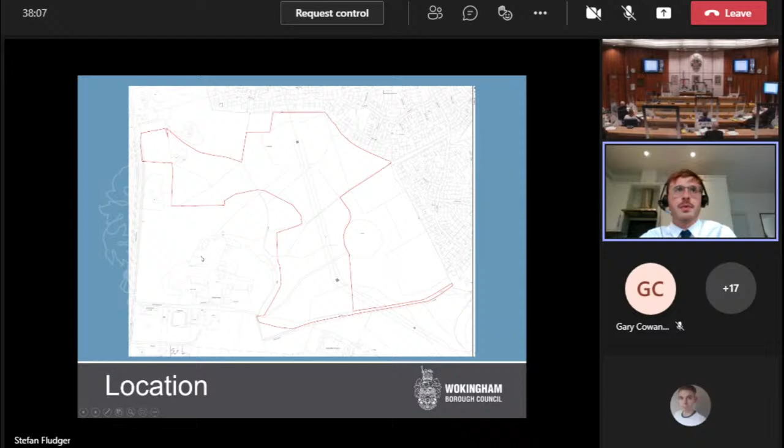This is the site location plan. You can see the Woosehill Estate here to the east, and Bearwood Road over here. The access would be from Bearwood Road, which you'll see in a moment.

This is an aerial image of the site, which shows the woodland pylon going through the middle, the Woosehill Estate over here, and again Bearwood Road over here.

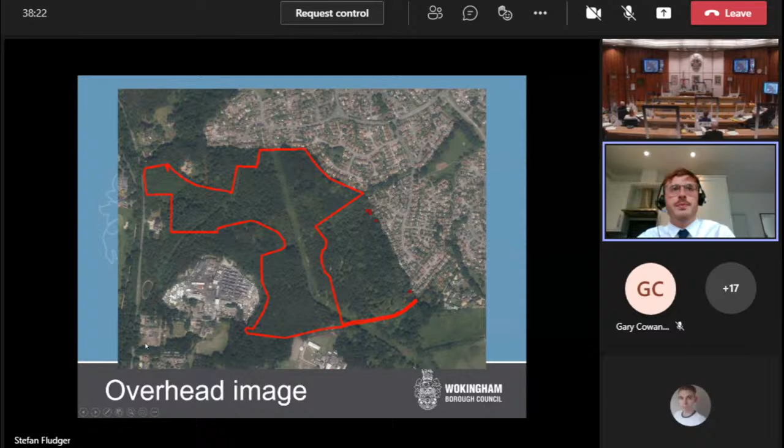This is the area that the car park will be in, which you'll see more clearly in a moment when I show you the plan, but there are the neighbouring properties here. The car park would be in roughly this location.

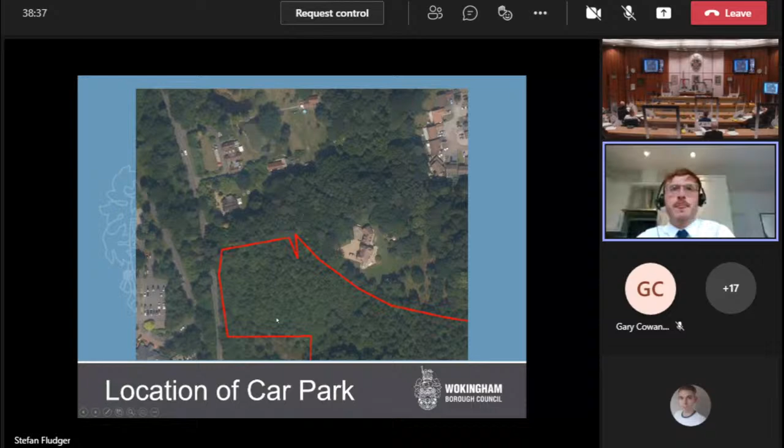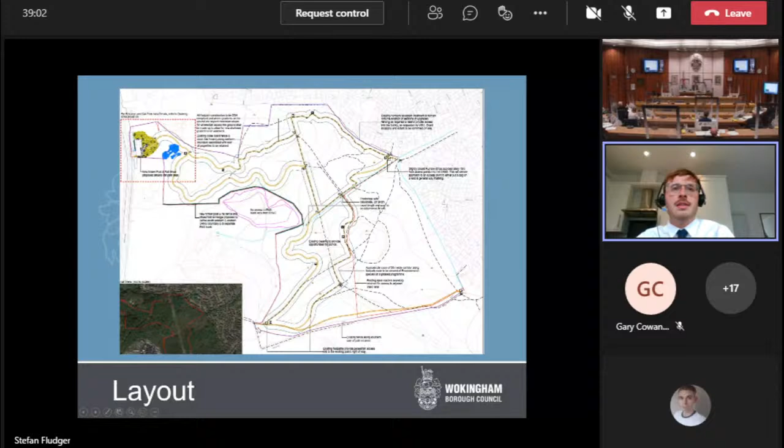This is the plan of the whole site. The yellow line shows the approximate location of the proposed footpath. This is an existing public right-of-way into the site. This is the existing access off of Dorset Way. This would be where the car park is, and this is the existing access off Highlands Avenue.

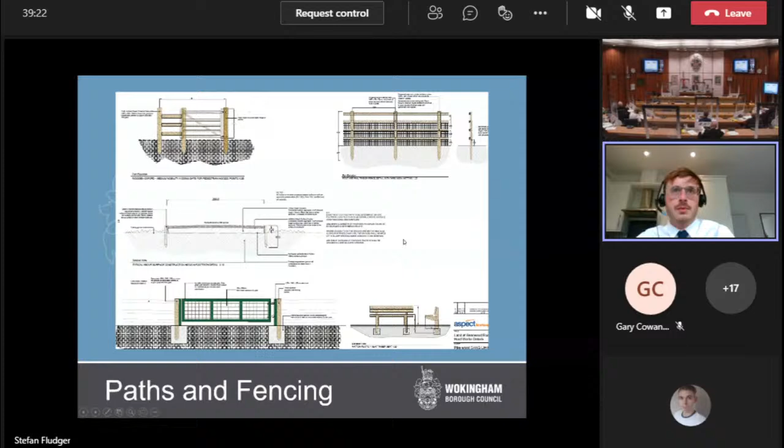These are the proposed gates, fencing, seating, and footpath surfacing. And this is the car park area, which shows the 18 parking spaces proposed, including 3 disabled spaces.

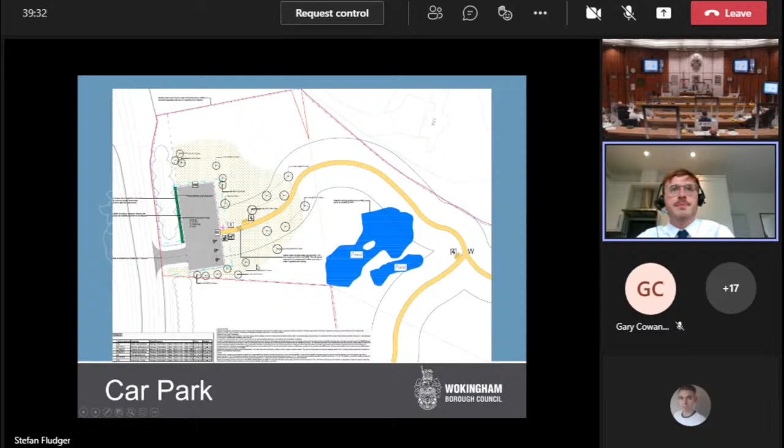There would be substantial rhododendron removal on the site, which is an invasive species. These are just a couple of images to show you the density of the rhododendron in some areas of the site.

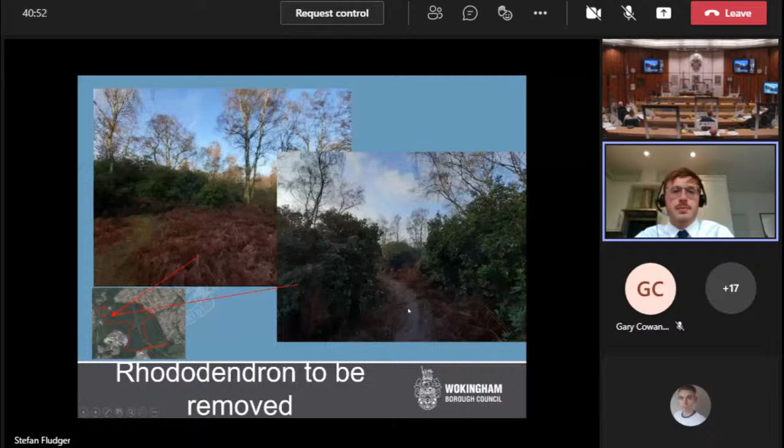However, it would be managed.

So, in conclusion, the proposal is acceptable in principle. There would be minimal changes to the character of the area. There would be sufficient parking and no other highway issues or any other issues. It's accordingly recommended for approval.

In terms of updates, there's nothing included within the supplementary planning agenda as this was published yesterday. However, I've been informed that the comments from Wokingham Town Council on page 46 of the agenda are incorrect. These are comments from a previous application at the site. The council's comments relating to the application are included on page 87, and these are correct.

These indicate that the Town Council believe the footpath should be 11 metres from neighbouring house gardens for privacy. They have concerns relating to fire service access. They consider there needs to be a maintenance plan, and they have concerns relating to the noise at A1 Business Park, just to make their comments clear. These have been addressed in the officer report. Thank you very much, Chair.

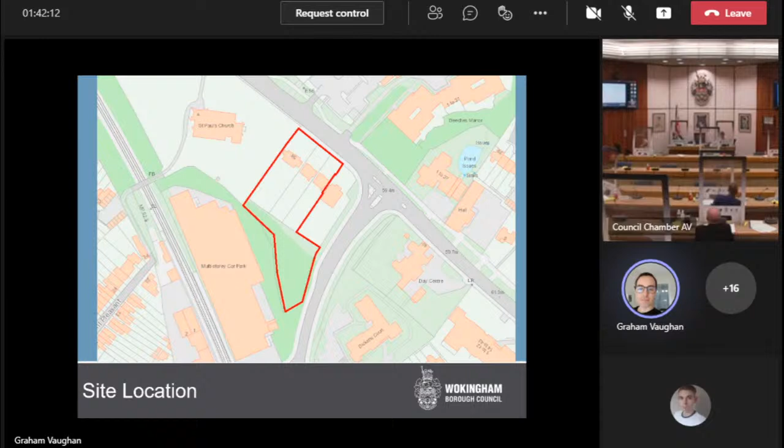The proposal is for the development of a 3-storey, 34-unit retirement living apartment scheme with associated communal facilities, parking and landscaping. Due to the shape of the site, the building has been designed in a T shape with the main body of the building addressing Reading Road and a further element projecting into the site.

A separate entrance and exit to Reading Road, as well as some parking spaces, would be provided to the front of the site, and the access road would continue along the southeastern edge of the site to a larger parking area, as well as the communal garden area.

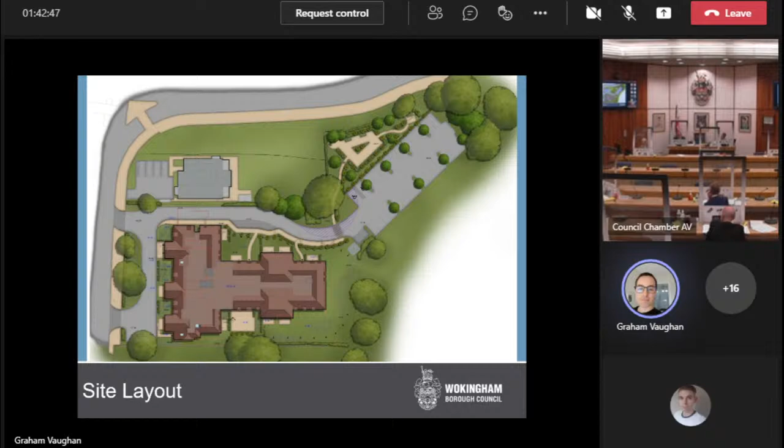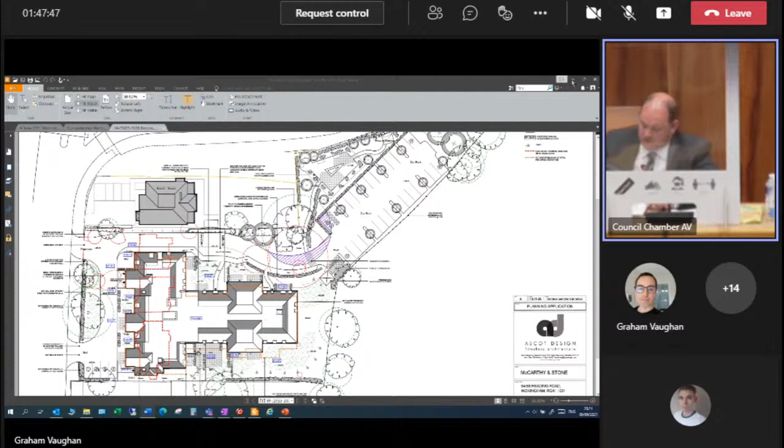The proposal in front of you this evening is for 34 age-restricted retirement living apartments set around communal facilities to provide comfort and security while supporting people to live independent, healthy, happy lives in their own homes. Such accommodation is much needed nationally and locally.

Indeed, national planning policy guidance states that it is critical that local authorities deliver housing for older persons, and is the only type of housing to have its delivery described in such urgent terms. Locally, the over 65 population of Wokingham is forecast to grow by 73% by 2036, which is higher than for the South East region or England as a whole.

This necessitates a need for over 2,000 elderly person units, where current supply is less than the county average. This clearly shows that there is a need for such development within the borough. The site is well located with easy links to the rest of the town and beyond.

The development itself is of high quality, respecting local context, while the use of materials, existing vegetation and new planting will further integrate the proposals. There have been no objections raised by local residents or the town council.

The impact upon the neighbouring listed church is less than substantial and outweighed by the benefits of the scheme, and English Heritage have raised no objections. There have also been no objections from highways regarding access and parking.

The proposed scheme will deliver a range of benefits alongside the agreed affordable housing and CIL payments, helping to support growth in the local economy and nurturing communities. Retirement housing generates greater local spend than other developments, generating over £500,000 of spending per year, approximately 40% of which is spent in the local high street, and will provide vitality to the regenerated town centre.

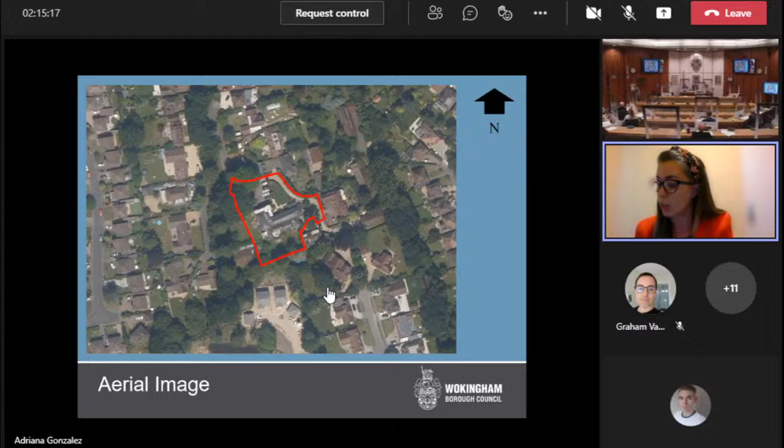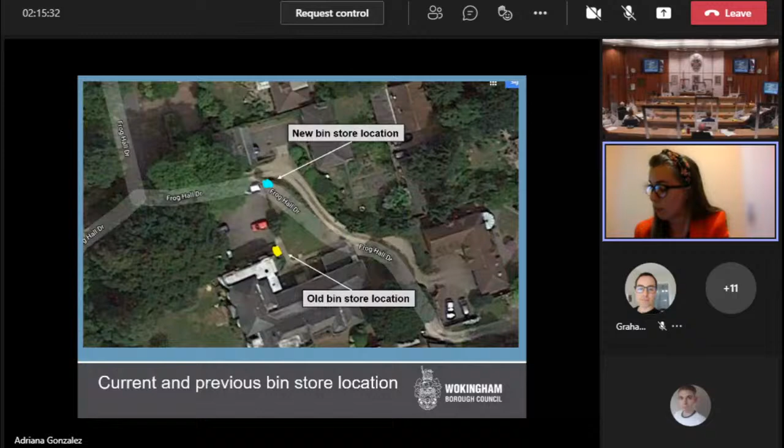This is the location plan. The bin store, as highlighted in blue on the slide, is located within part of the private residential amenity of the block of flats towards the front northeastern corner of the site. It has direct access from the private right-of-way, which is a single carriageway, providing access to the block of flats and properties 40 to 46 Frog Hall Drive towards the eastern side.

The previous location of the bin store, highlighted in yellow on the slide, was not suitable for storage and disposal of domestic waste for all the flats, being too small and far away from the council's collection point.

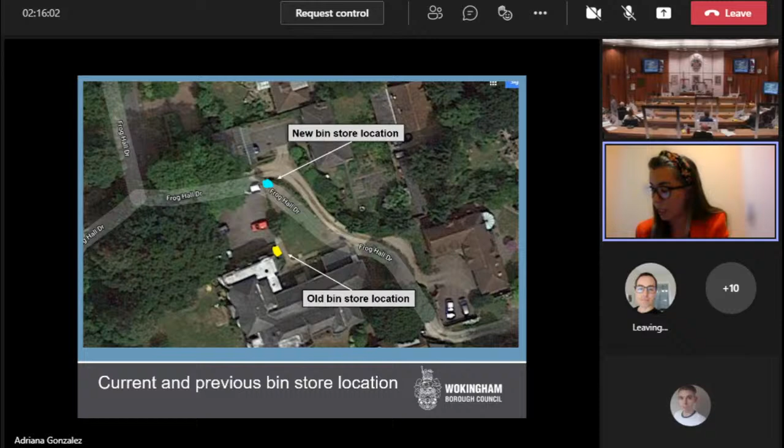This is the location of the bin store in relation to the block of flats and adjoining properties. It is suitably located for easy access for the residents and for collection, and adequately screened from public views with suitable landscaping so that it does not result in any harm to visual amenity or local character.

The location of the bin store does not restrict access of service, delivery, or emergency vehicles to properties located within the right-of-way, and it does not represent a material difference to the previous situation where trees and hedges were right up to the edge of the carriageway. There have been no objections from the Council Highway Officer, nor from the Royal Berkshire Fire and Rescue Services, on highway safety grounds.

The recommendation is that the retrospective proposal makes adequate provision for the storage and collection of domestic waste and recyclable materials, having regard to neighbouring amenity and the character and appearance of the surrounding area. The proposal does not represent a material difference to the existing situation in terms of highway access and safety, and it is therefore considered that the development accords with national and local planning policies, and so it is recommended for approval. Thank you, Adriana.

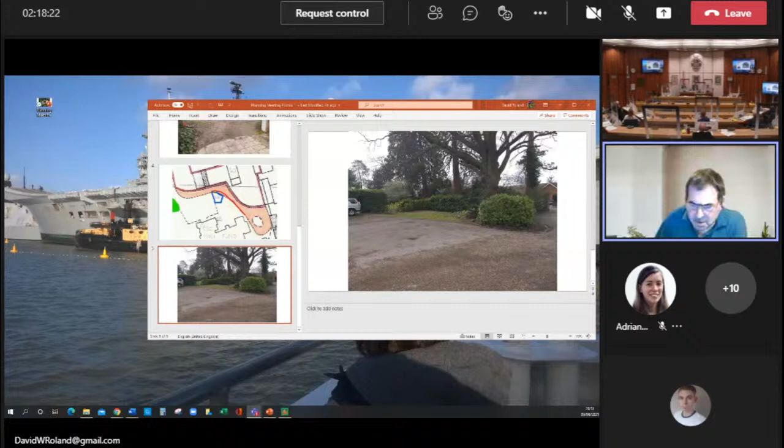Right. And can you see the slides, or? Hello? Quite small. Right, okay. Right, is that better?

Okay, right. First of all, I'll start off by saying I'm speaking for all those who object to this retrospective planning permission, and I repeat that it is retrospective planning permission. There are 2 basic objections to the bin area. One is the restrictions to access to the neighbours, the Frog Hall flats, has been reduced over decades, and this bin area does finally block the access to any larger vehicles, and it causes problems to delivery vehicles getting around there.

This disregard of the neighbours by the residents of Frog Hall does not really affect the planning permission, but it does reflect the way they should consider the concerns of the neighbours before they actually build a solid waste storage area.

The second point is that recommendations are that solid waste storage area should have proper drainage and washdown facilities. This area does not. It's also recommended the area should be in the shade. The previous area next to the hall was in the shade, and it caused problems with smell. The new area is in full sun all day, but according to the residents, does not cause any problem with smell. The previous position had a negative effect on the sale of the flats, and I think it is some of the owners of the flats who had pushed to have this new bin area built.

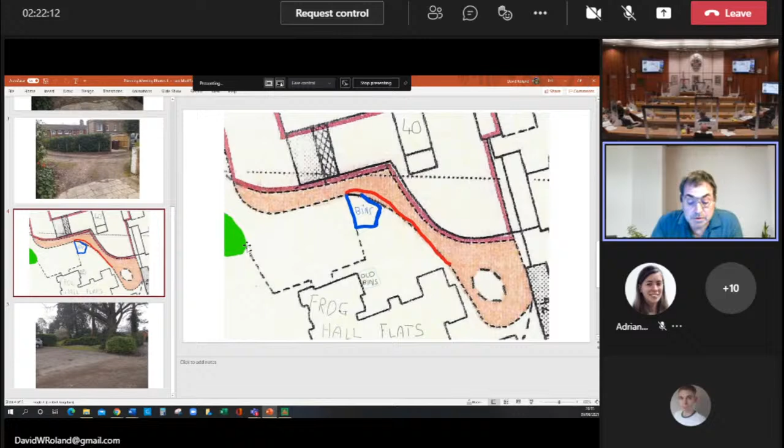And it will be wrong if this is allowed now simply because it has already been built, so I trust that you will reject this retrospective application.

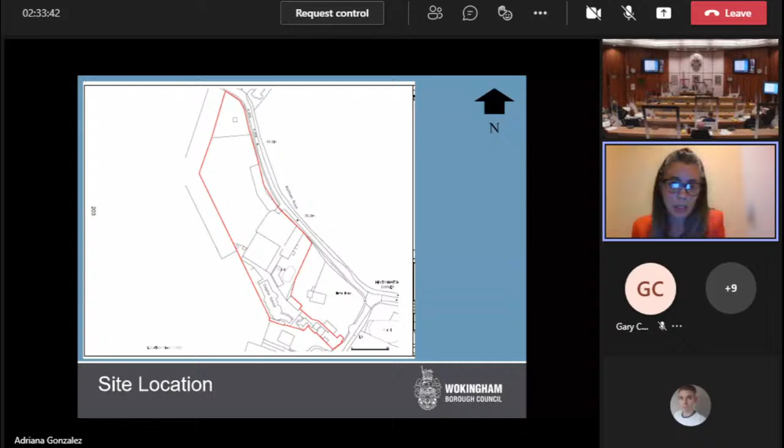Thank you, Chair. This is planning application 210805 for Dolphin School for the proposed erection of a 2-story building to create additional classrooms, toilets, and library facilities with associated roof terrace. The proposal site is within the grounds of Dolphin Private School to the southwest of Waltham Road in Hurst, and it is part of the countryside. The eastern boundary of the site adjoins the curtilage grounds of Hinton House, which is a Grade 2 listed building. The site comprises approximately 1.8 hectares, and that's the reason why it's been classed as a major application.

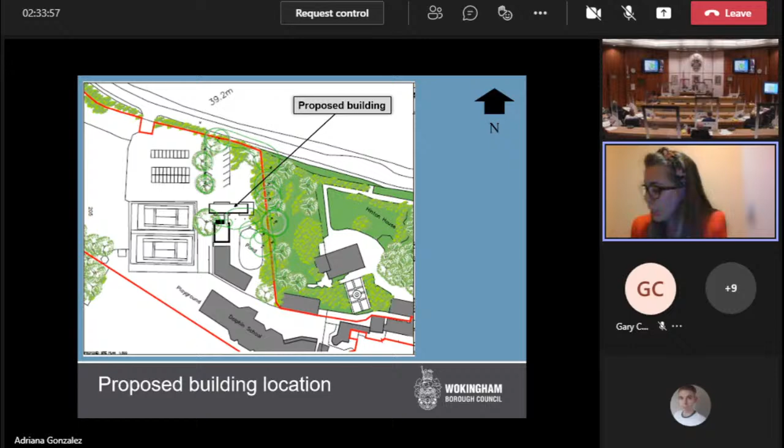This is the location of the proposed building. It would have an internal floor space of approximately 268 square meters, split into 2 levels. The proposed form and scale would be commensurate to the existing buildings on site. These are the proposed floor plans showing 2 classrooms, music room, and toilets at ground floor, and library and art room facilities at first floor.

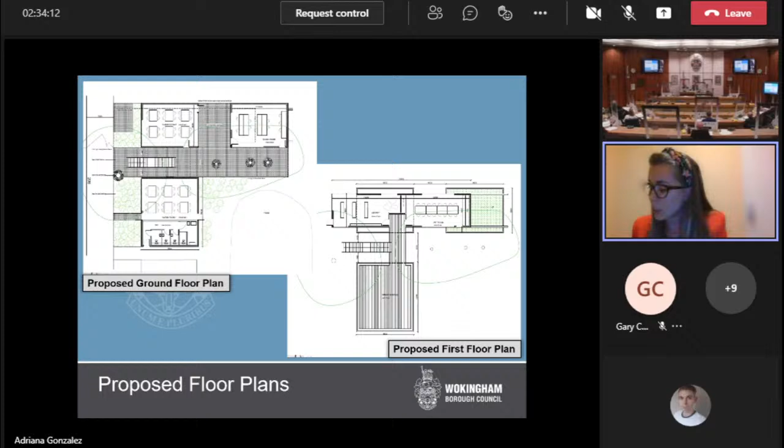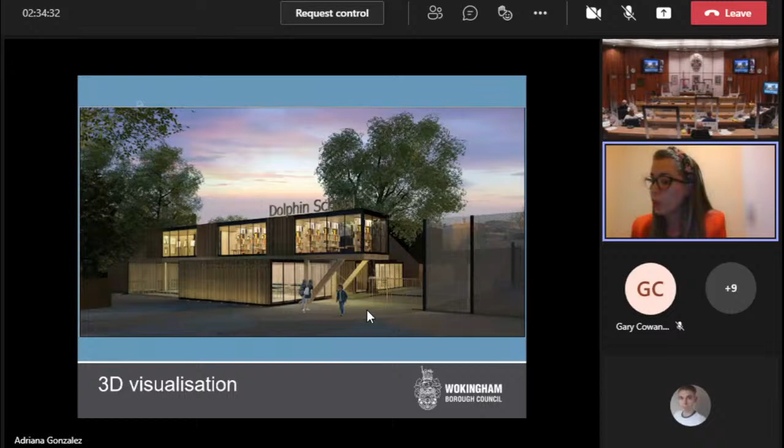To conclude, the proposal would provide a building of adequate scale and design to accommodate a much needed new educational unit within Dolphin School. There would be no detrimental impact upon the street scene or significance of the adjoining heritage asset, nor upon the character of the surrounding countryside, and subject to conditions, the application is considered to accord with national and local planning policies, and it is therefore recommended for approval. Thank you, Adriana.

Speakers, there's no representations or objections on this, but I think Stephen, you wanted to speak. Thank you, Chairman. All I wanted to say on this was obviously there is the issue of the setting of the listed building and the historic wall along Waltham Road, which I happen to pass on the way here this evening.

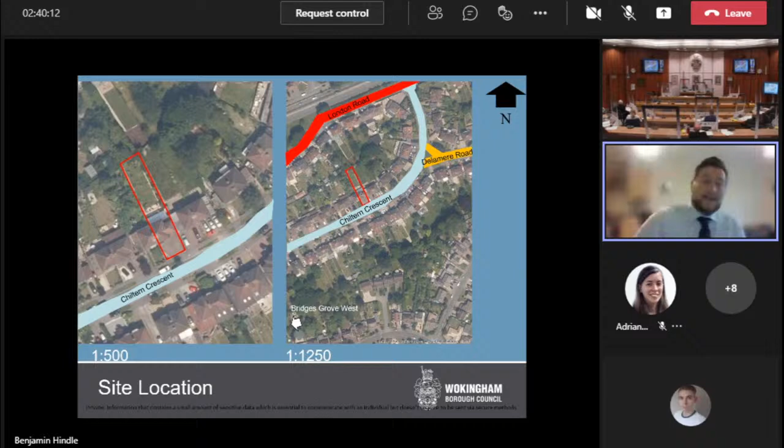I've outlined two plans here, a site plan and a location plan. To the left, the site is outlined in red. It's located in the major development location of Earley in the Bulmershe and Whitegates ward, midway down Chiltern Crescent. For the purpose of latter analysis, I've highlighted London Road and Delamere Road, as well as annotated Bridges Grove, due to the wealth of examples, to show visually how close they really are.

The application site itself is an asymmetric semi-detached dwelling, adjoining number 55, but not adjoining number 59. The reason we can class this as an asymmetric semi-detached dwelling is under application number 32250, a two-storey side extension with a hip end, to be retained, and a single-storey front extension were approved.

Now, this naturally unbalanced number 55 and number 57, which sounds far more detrimental than it is, because this is just one of a wide range of examples of unbalanced semis along Chiltern Crescent. There are over 30 examples of mismatched dwellings in some way, and that's 30 examples of pairs, not individual dwellings.

As for the plans themselves, the only parts actually visible from Chiltern Crescent would be the hip to gable conversion to the front and two roof lights, for which there is precedent along Chiltern Crescent, and both are of a very minor scale. Further, the proposed dormer is in accordance with the guidance within the Borough Design Guide, figure 4.37 on page 57, which clarifies it should be set down from the main ridge, set in from the sides and set up from the eave.

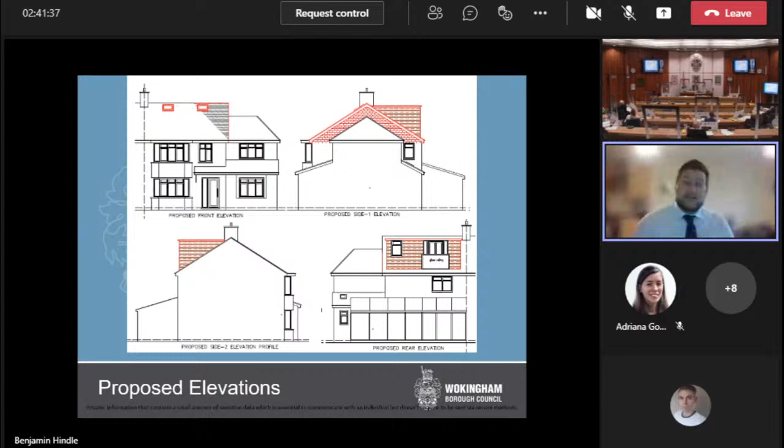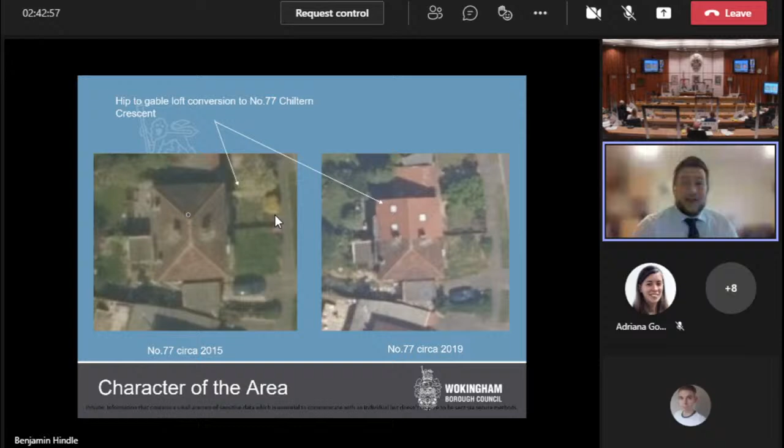That is a far more prominent location to establish Chiltern Crescent's new character of a large variety of roof forms. Finally, there was objection received on the actual bulk and scale of the proposed, and number 4 is far larger than the proposed, and it's one example of many along Chiltern Crescent of these large bulky extensions that have been approved, and it has added to that precedent.

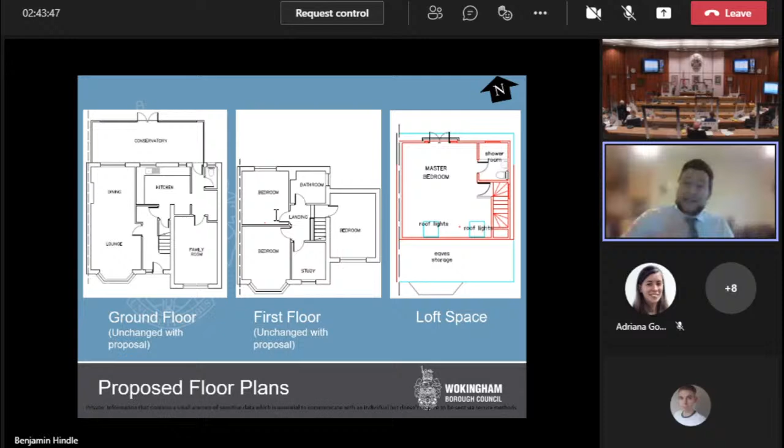For completion, here are the floor plans, and this is really indicative of how minimal the application really is. It's the addition of 1 habitable room and 1 shower room. This features a Juliet balcony and window to the rear. This is located 55 meters away from the nearest neighbour to the rear and has the same arc of outlook as your standard window, located just 1 meter above the existing window on the first floor.

In line with the 1 new habitable room proposed, the existing parking provision of 3 spaces is considered more than adequate. I can condition this on page 216 to ensure that this is retained at all times, and this is in line with our adopted parking standards.

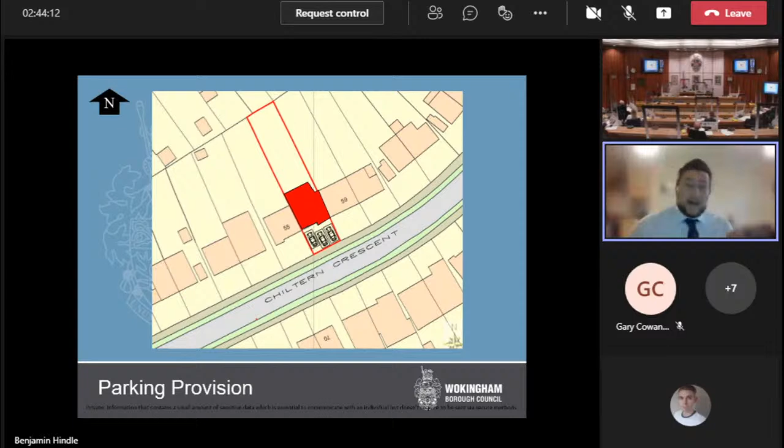Further, it's to be noted that this is as existing, and as it's hard landscaped already, there will be no reduction in green softening whatsoever, so no impacts or further impacts to the character of the area.

The proposed development would not lead to a harmful impact upon the character of the area or the amenity of neighbouring occupiers, nor would it result in a detriment to highway safety and parking provision. It is therefore recommended that the Planning Committee authorises the head of development to grant planning permission subject to the conditions set out in the report. These are on pages 216 and 217. Thank you very much for your time.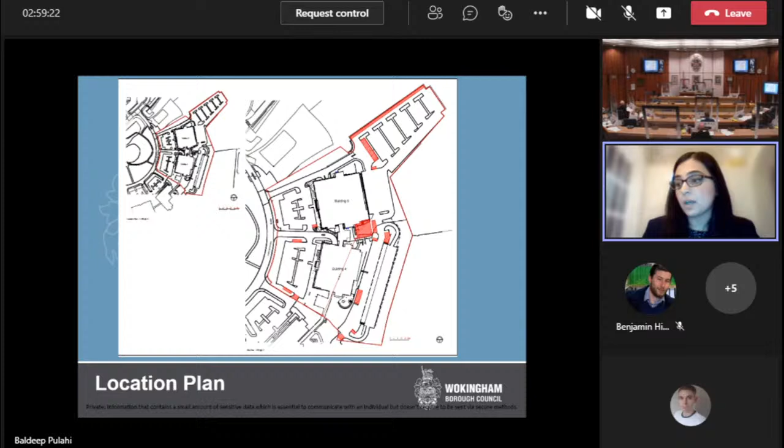This is currently the existing location plan. Buildings 4 and 5 are located on the southeastern part of the Microsoft campus. They're existing commercial buildings with external car parking and landscaping, part of the wider Thames Valley Business Park. This is the proposed site layout, indicating the variety of works proposed. The scheme will improve the use of the external areas of the site and make better use of the underutilized parts of the site.

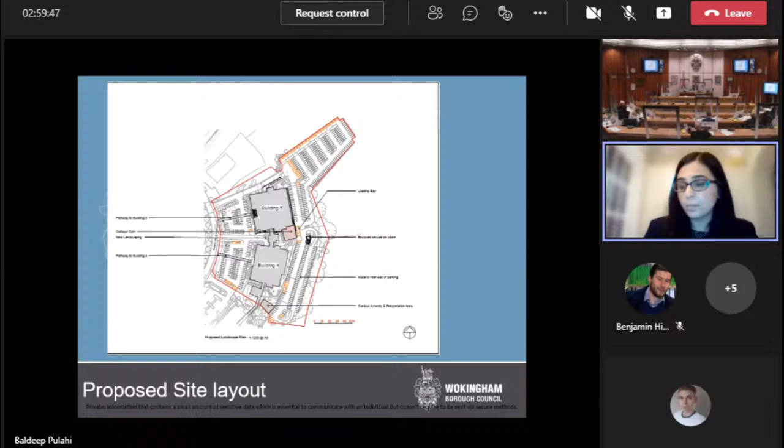The proposed new bin store will be 11 meters wide and 2.1 meters high. It will be an enclosed store finished in timber cladding, which is an acceptable use of materials in the commercial setting. So this would be the outdoor gym area.

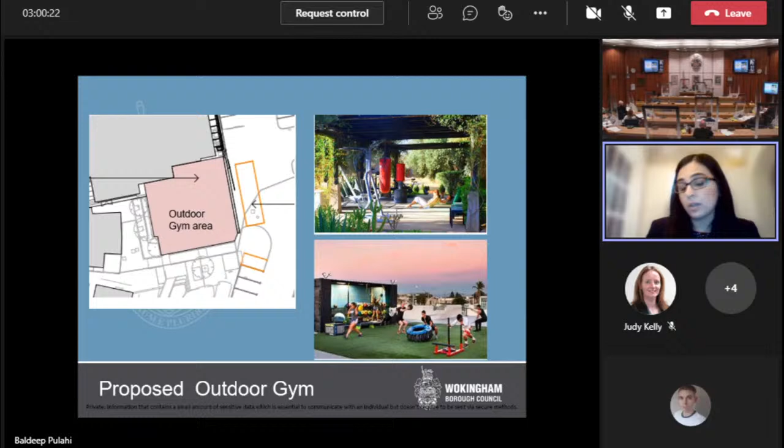These visuals have been provided by the agent. It will be a hard landscaped area and a flexible space for outdoor activity and workout classes, with new soft landscaping included around this area.

This is a designated outdoor amenity and presentation area. Again, visuals have been provided. This area will provide outdoor seating and deliver an improved area for employees for outdoor presentation and gathering.

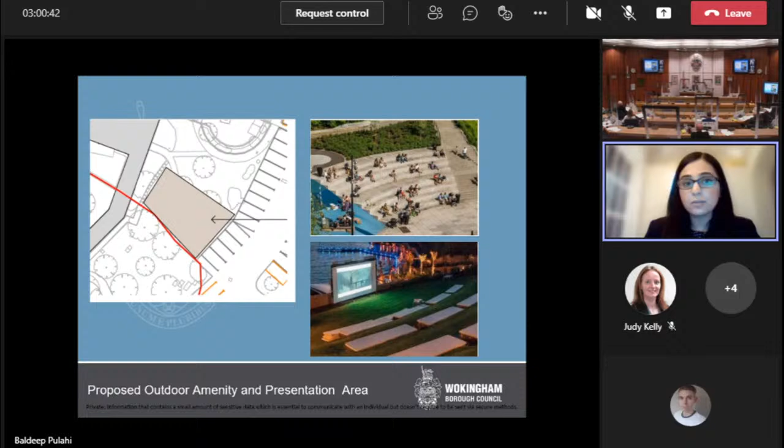Thank you very much. No speakers and no objections. Anyone have any points they'd like to raise?

Yeah, Carl. Just to say that it's obviously an upgrade, and hopefully they're going to bring more companies and more jobs to the park, so that's good. I was a bit disappointed with the number of charging points for electric vehicles specified. We're talking about our emerging standard, and then it said there would be an extra 2, and the car park has 586 spaces. But I'm assuming that's a proportion of what's being added. Obviously a place like this needs a lot of those, but it'd be unreasonable to consider refusing it on that basis.